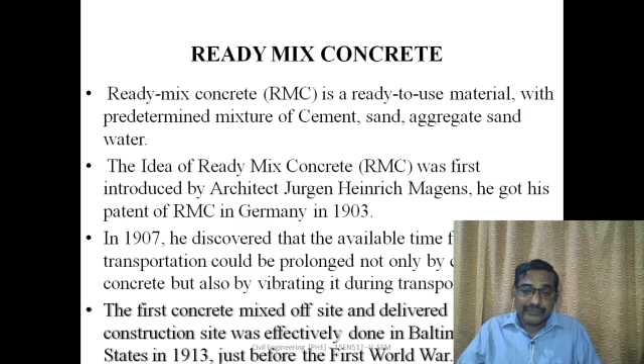The first concrete mixed off site was delivered in the United States of America in 1913, just before the First World War. The first concept of the transit mixer was also born in 1926 in the United States of America. Later, in 1939, the first RMC plant was established in England, United Kingdom. Between the 50s and 80s, in these 30 years, the growth of RMC took place all over the world.

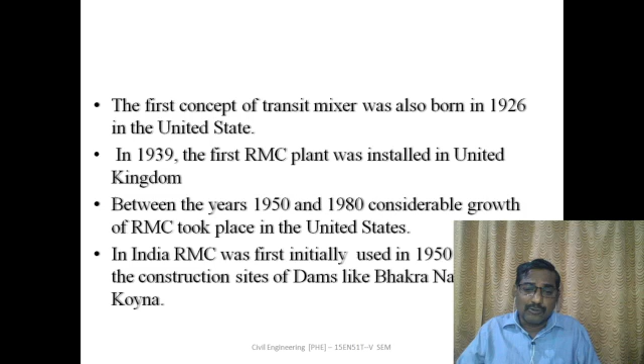In India, RMC was first used in 1950 during the Bhakra Nangal Dam and Koyna Dam. The important advantage of RMC is that a centralized concrete batching plant can serve a wide area. The trucks or tankers can reach remote areas also. The plants are located in areas zoned for industrial use, but they deliver in trucks and tankers to all residential areas and inner cities wherever it is required.

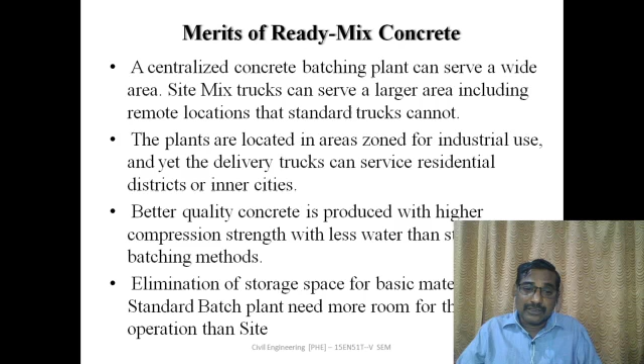Better quality concrete is produced with higher compressive strength with a lower water cement ratio. Storage space on site is eliminated as ready-made concrete is available. It eliminates the procurement and hiring of plants, machinery and materials. Wastage of basic material is avoided with a mix truck. There is less wastage and washout. This is better for the environment also.

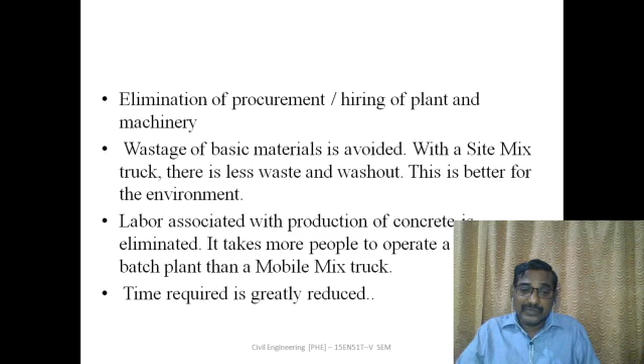Labor associated with production, transportation and placing is very less as compared to normal mix of concrete. And the time required is automatically reduced by 50%.

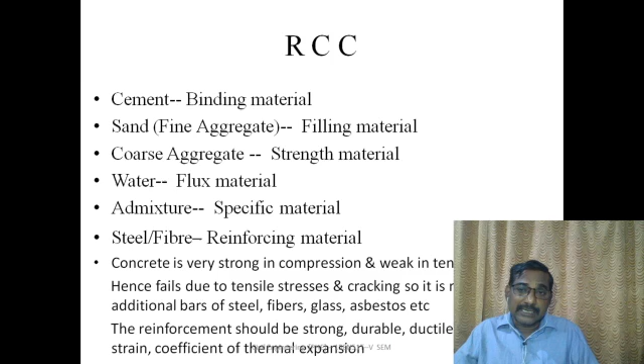Next is reinforced cement concrete. As we know, cement, sand, coarse aggregate, water and admixtures are used for concrete, which is strong in compression and weak in tension. To increase the tensile strength, reinforcement bars are used in the form of fiber or steel. The reinforcement should be strong, durable, ductile, with high tensile strain and a coefficient of thermal expansion to reach the stress strain as in concrete.

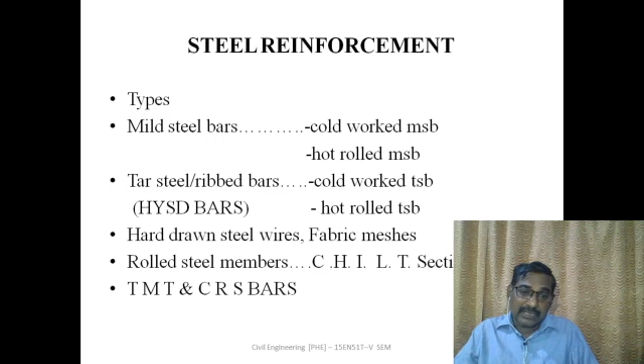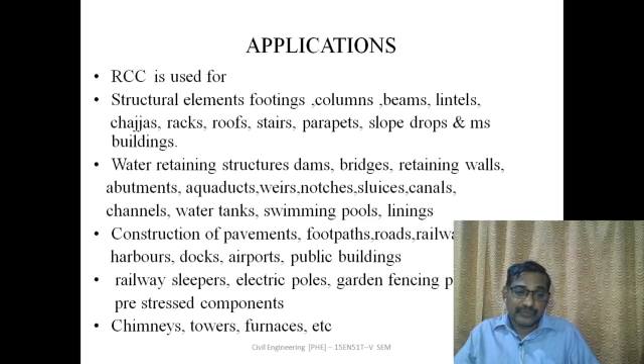Next, in construction of pavements, footpaths, roadways, railways, harbours, docks, airports, public buildings, sports grounds, stadiums, etc. And it is used in manufacturing of railway sleepers, electrical poles, garden fencing poles, pre-stressed components, chimneys, towers, furnaces, etc. So these are the different types of special concrete which we generally use.

Next, introduction to limit state method design. As per IS Code 456:2000, it is the ideal method which considers ultimate strength, serviceability, durability, and safety. Limit state of collapse deals with strength and stability of the structure under maximum design load, durability of the structure, and failure of the structure. Limit state of serviceability deals with deflection and cracking under the service load, that is durability and failure of the structure under the maximum load conditions.

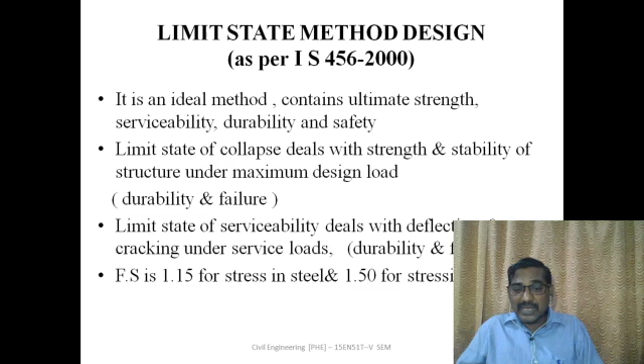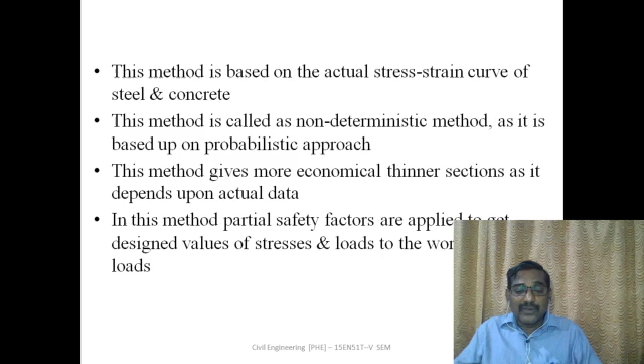We also consider a factor of safety for stress in steel of 1.15 and for stress in concrete of 1.5 in limit state design. This method is based on the actual stress strain curve of steel and concrete. It is called a non-deterministic method as it is based on the probabilistic approach. This method gives more economical, thinner sections as it depends upon actual data. In this method, partial factors of safety are applied to get the design values of stress and loads for working conditions, that is working load and working stress.

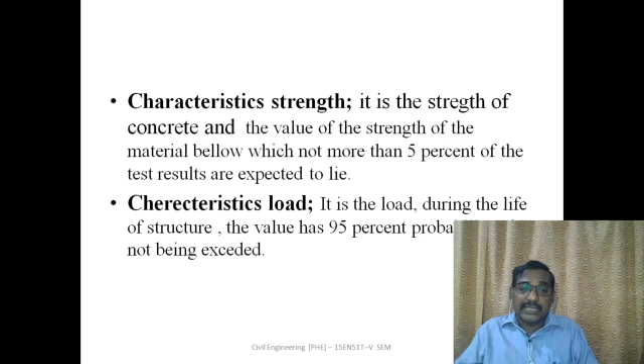Characteristic strength is the value of strength of the material below which not more than 5% of the test results are expected to lie. The characteristic load is the load during the life of the structure whose value has a 95% probability of not being exceeded.

We make some assumptions in limit state design, as in the case of the simple theory of bending. Plane sections normal to the axis remain plane after bending. That means the deflection is neglected. The maximum strain in the outermost compression fiber is 0.0035 in bending. The maximum strain in tensile reinforcement is Fy / (1.15 Es) + 0.002, where Fy is the characteristic strength of steel and Es is the modulus of elasticity of steel.

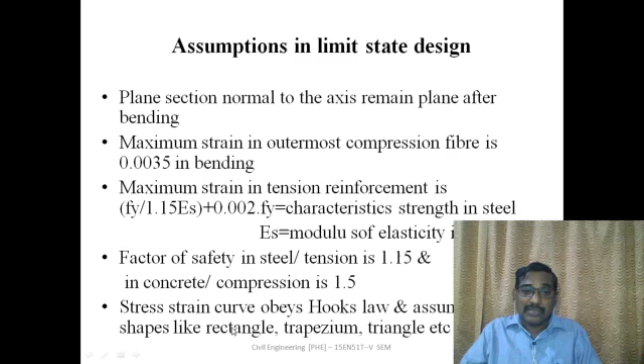The factor of safety in steel is 1.15 and in concrete is 1.5. The stress strain curve obeys Hooke's law, that is, stress is proportional to strain, and known shapes like rectangle, trapezium, triangle, parabola, etc. are assumed to calculate the area. So this completes the second unit.